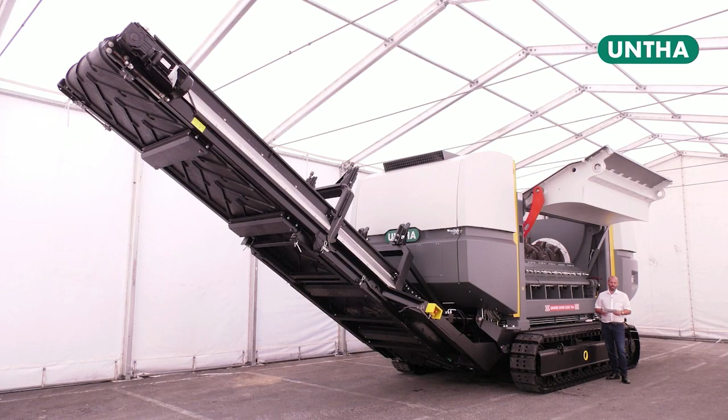First of all, we're starting with our new RC system. What is the essential principle of this system? This is a one-shaft shredder, a slow-speed shredder with an electric drive without a RAM device.

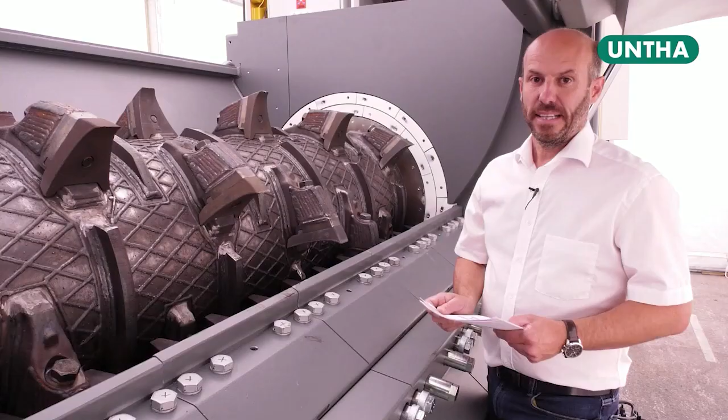For which application are we using this type of machine? This is mainly developed for waste applications, meaning MSW, C&I, bulky waste, or even waste wood and organic waste shredding. The output of our customer survey showed 2 hot topics.

The first hot topic was to have fast maintenance of the cutting system in the event of wear. We are fulfilling this through the small amount of cutters on the rotor. The second hot topic was to have a robust cutting system, which we fulfill through the size of the cutter and the fixing system we developed.

I want to show you now the technical details of this cutting system. First of all, we are starting with the cutting principle. You can see here we have huge cutters now, with a smaller amount of cutters on the total rotor.

Through the huge cutters, we are producing less fines during the operation of the machine. We are reaching a high capacity on the throughput side, and we are very aggressive to catch the material inside of the machine.

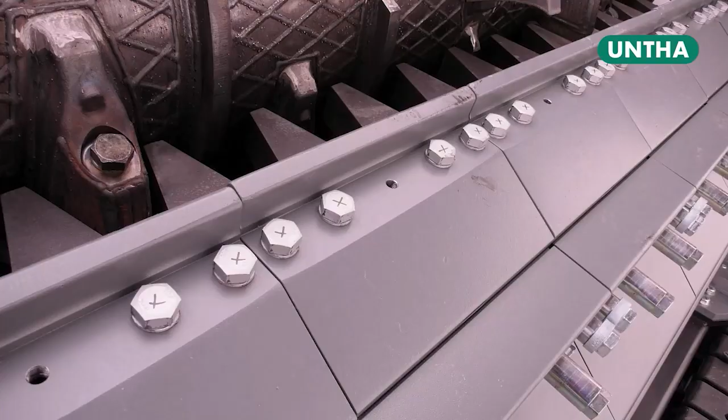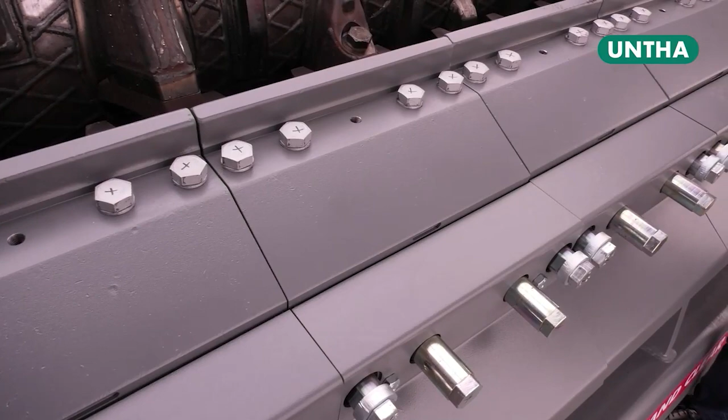How do you adjust the cutting gap? It is possible to adjust the cutting gap from 0 to 20 millimeters. This means you can extend the lifetime of the cutters if the customer adjusts the gap. On top of it, the machine gives better capacity, better particle size, and needs less electric energy.

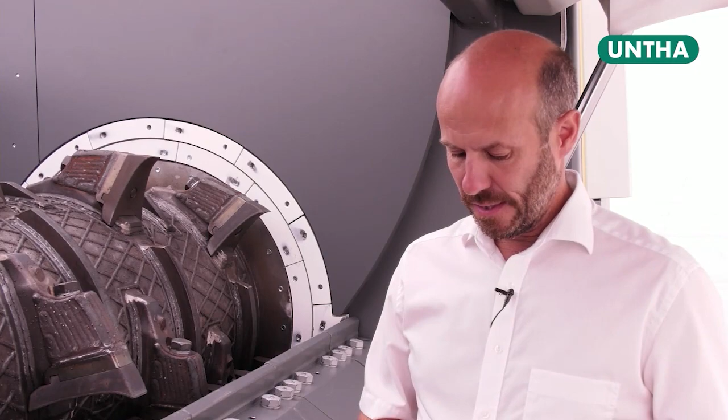The second advantage of this cutting system is that we are using no RAM device. This means the machine has, first of all, a lower purchase price. The second point is that we are getting a bigger feeding opening.

This is a quite important feature to feed the machine with shovel loaders or with big cranes. The third point is that using no hydraulic system and no RAM device needs less maintenance.

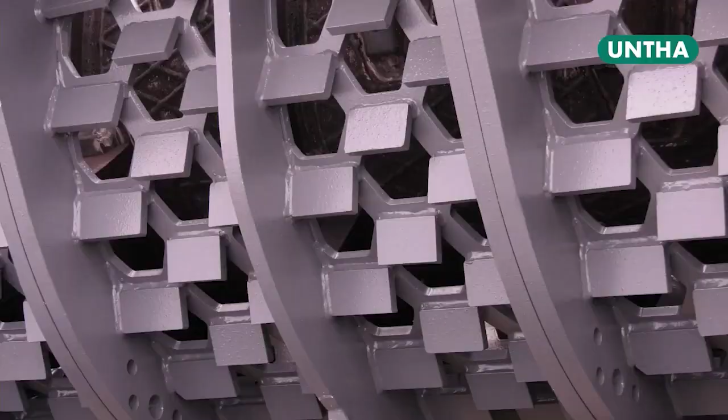The RC system can be adjusted with screens or with screen bars. Screens we use for the wooden application, meaning you can go down in one step to a real small particle size. Screen bars we use for the waste applications.

On screen sizes we have several sizes available. You can have this with or without chip breakers.

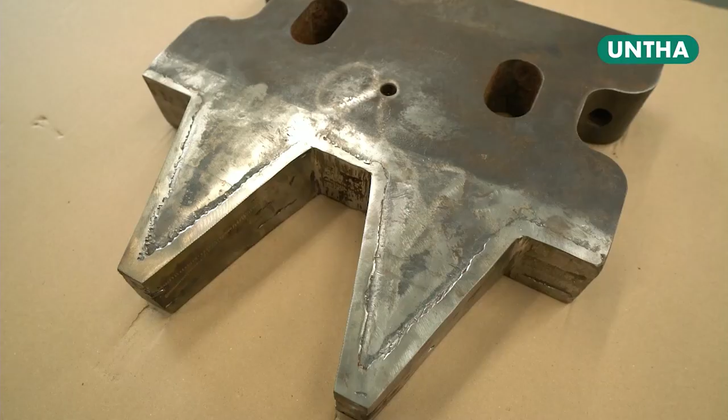How does the wear concept behind the RC cutting system look? The rotary cutters from the RC system are usable one time, the stator cutters two times. To have less wear costs, the cutters have to be wear welded several times.

Through the filler material on the cutting edges from the wear welding, the customer receives a longer lifetime compared with regular hardened steel. This work can be done after the warranty period by the customer himself, or UNTHA can offer this service.

At the moment this service at UNTHA is still some manual work, but next year we will have a machine-made solution available.

The customer can send various numbers of cutters to Kuchl, and we can provide this refurbishment. To manage this offer all over the world, we have to find solutions with our sales partners, who should give this service on a local basis.

Okay, so we have seen now the technical presentation of our new RC system. As next, we want to show you for which applications we are using this type of cutting system.

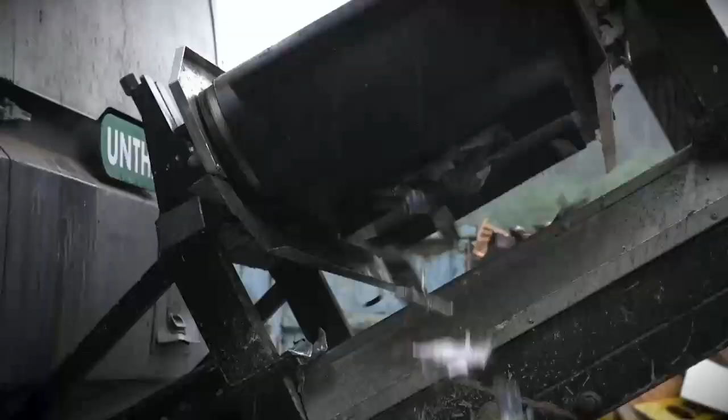Okay, on this video you could see a various amount of applications where we are using this RC system.

As next we want to go over to Daniel Vresnik. Daniel is our guy from the demonstration department, and he will give us a little bit of experience about what he has done with this new system on demonstration in the field.

Thanks, Christian. We did some specific machine tests on wood waste with a particle size of around 100 millimeters as the output size. This was more or less the task in a one-step shredding process to realize for different customers.

Therefore, we set up our demo machine in this kind of operation with different screen diameters, as also seen in the video, with and without chip breakers, to get full information about the situation. As a highlight, we had 2 long-term machine tests, one in Germany, where we did approximately 400 operating hours on site.

So we did a long-term run on the tool life to get real good figures about the tool life, as well as an overall throughput capacity, where we ended up as a resume at around 30 to 35 tons an hour, depending on the screen diameter.

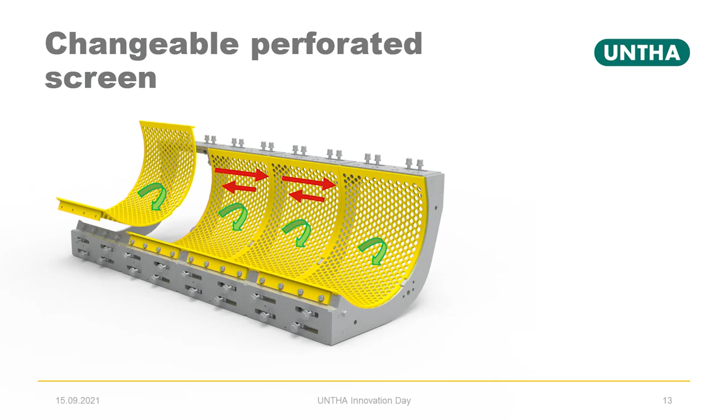Here you can see the picture of our new changeable perforated screens. This means we now have, as standard, included in our C models, and XR models are from now equipped with these changeable inlets. This means you just have to change the inlet as a wear part, and it's possible to rotate the screen 180 degrees and put the inside from the outside areas. So this is now included as standard on all our XR machines, and is something new on the innovation side.

As next, we want to show you a future development. This means this is something not available now, but will be available from spring next year. And we will show you the presentation of our new e-traction drive.

I want to give you now a preview of future developments. We had in the history customers which are moving the machine in a seldom way, meaning they are moving the machines every 2-3 months. But we also have customers which are moving our mobile machines in a frequent way.

This means they are moving every week, for example. On top of it, they have longer distances to drive the machine. And for this type of customer, our existing solutions are at the moment too slow.

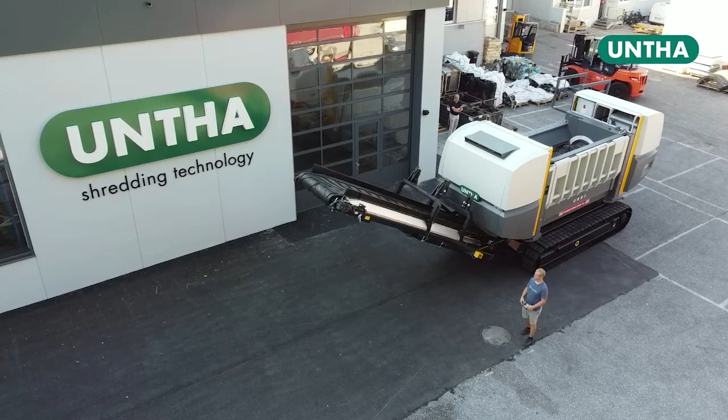For this requirement, we have developed a new driving unit which will run much quicker than the existing system. The request was that we increase our speed from actually 0.3 kilometers per hour to up to 1 kilometer per hour - this means 3 times the speed of the existing solution. For this, we have developed an electro drive on a battery basis.

Why have we changed now from our benzene or petrol generator to a battery pack? The reason was that to increase the speed, we need 3 times the size of the current power pack, and there was no possibility to have that place available on the existing frame of the mobile machine. So we had to develop a much more compact power pack, and this was one of the main reasons we could fulfill this with a battery pack.

The second reason was that our gasoline generators had from time to time a little trouble after longer standstills. This means if we are sending the machines overseas, it could happen that they had trouble starting afterwards. The advantage of the battery pack is that it keeps the energy and no start procedure is needed. On top of it, we had customers working with contaminated petrol and filters, which also gave some trouble with the generator. With battery packs, this will not happen.

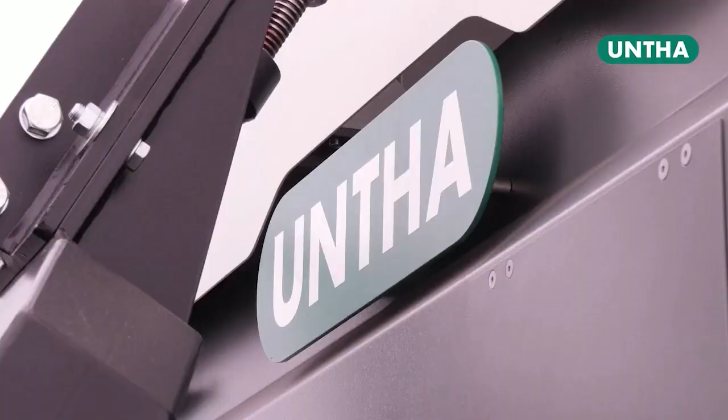For that reason, we developed this new system, and we will have it available in spring next year. I want to explain now the technical solution of this drive.

We will have two battery packs available. One will be the standard pack, which fulfills regular requirements, and the second will be a bigger pack, which can give a longer run for the machine for customers running wide distances. The battery is a special gel accu pack which needs no maintenance and no filling water required. The total drive will be controlled by a new remote control where you can drive the machine.

Thank you, Christian, for this great overview of the next stage of our XR shredder. Pretty informative. So yeah, thank you.

Great news. Next, we would like to present a pioneer in technology. And once again, we will start with this video.

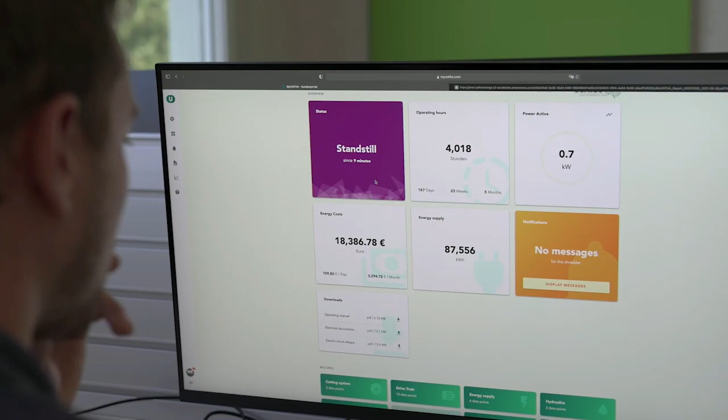Well, what a fascinating topic. We call this UNTHA Genius, and we call it the shredder's brain. And I'm sure you're going to be amazed, and hopefully Marcus is going to be the guy to amaze you. So I'm now going to hand you over to Marcus Ebel, who is the expert on the Genius technology.

Marcus? Thank you very much, Gary, for the introduction. I would also like to welcome all of our viewers. And today we talk about Genius.

It's already 3 years ago when we decided to bring shredding to the next level by digitizing our products. As you all know, from a historical point of view, we are a company that mainly deals with the development of mechanical solutions, mechanical engineering. So this was completely uncharted waters for us, completely new, and we were faced with a lot of questions at the beginning.

What is digitization, or what does digitization mean in terms of our machines? What are the advantages that this product should bring to our customers? We made our thoughts about this question and brought up Genius. And now I have a short clip for you that should answer most of these questions.

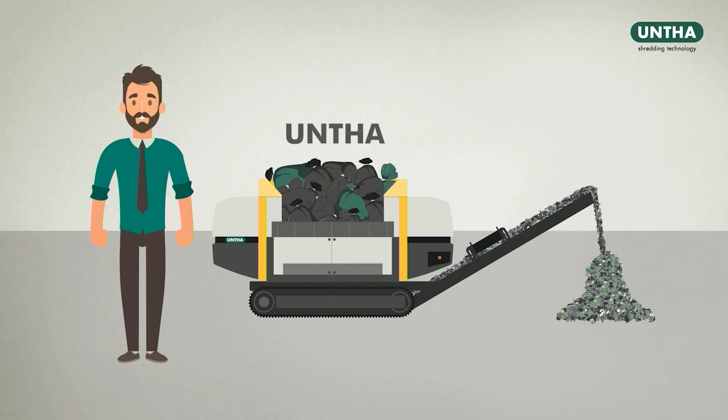UNTHA Shredding Technology. This is Mr. Meyer. He is the CEO of a waste management business and operates a recycling plant with an UNTHA shredder. Mr. Meyer is happy with his shredder, but there is always the risk of an unscheduled shutdown of his plant. It's always annoying when it happens, as these interruptions cost time and money. To increase plant availability, Mr. Meyer is keen to avoid future shutdowns as far as possible. There is now a great solution to help him achieve just that.

UNTHA Genius, your shredder's brain, the intelligent condition monitoring tool for UNTHA shredders. This tool presents Mr. Meyer with several advantages: a high level of plant availability, the immediate correction of deviations, increased productivity, significant cost reduction, and maximum data transparency in real time. Via the customer platform myuntha.com, Mr. Meyer is able to analyze, manage, and optimize his UNTHA machine pool in an easy, user-friendly manner. He is able to review all process and operating data at any time and is always up to speed on the latest condition of his machine, as well as the exact energy costs.

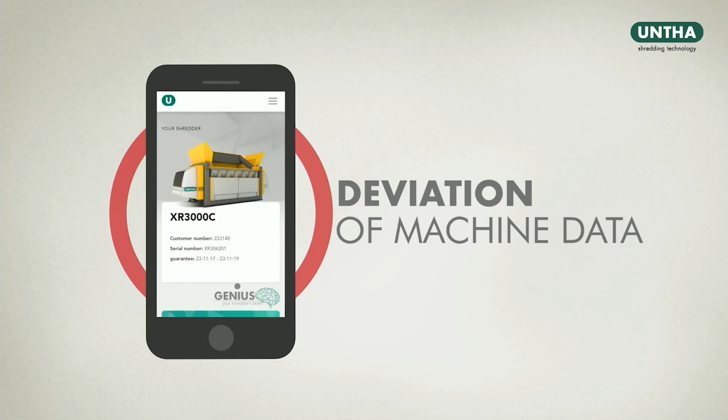Mr. Meyer can identify looming machine issues before they happen, plan service calls, and punctually order spare parts. As soon as a deviation of machine data is detected, an alarm push notification is sent to his smartphone or PC, helping him identify the fault and decide what to do next. He can access and evaluate productivity reports for his plant at any time, daily, weekly, or monthly. For questions, he can contact the UNTHA Customer Service Centre to clarify details, arrange a service call, order spare parts, or purchase additional service products. Since Mr. Meyer began using Genius, he has benefited from higher plant availability, increased utilisation, reduced operating and wear costs, and maximised cost effectiveness. This makes Mr. Meyer very happy indeed. UNTHA Genius, your shredder's brain.

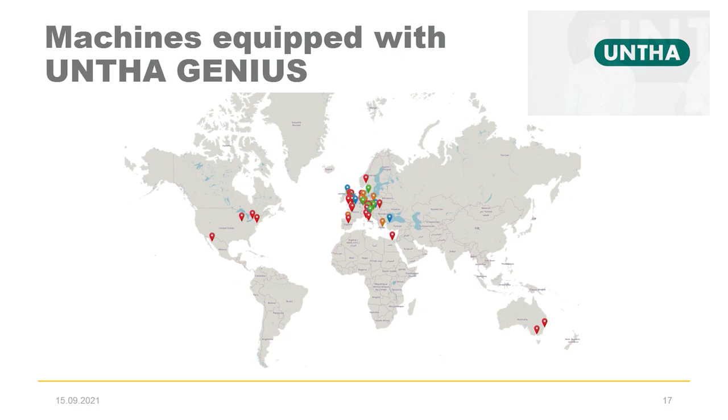After 2 years of development, we are pretty proud that last year we launched our first digital product, Genius. One year later, today, we've equipped more than 100 machines with Genius, and I brought a map with me where you can get a small overview of where the machines are distributed. You can trust me, those machines are getting more and more.

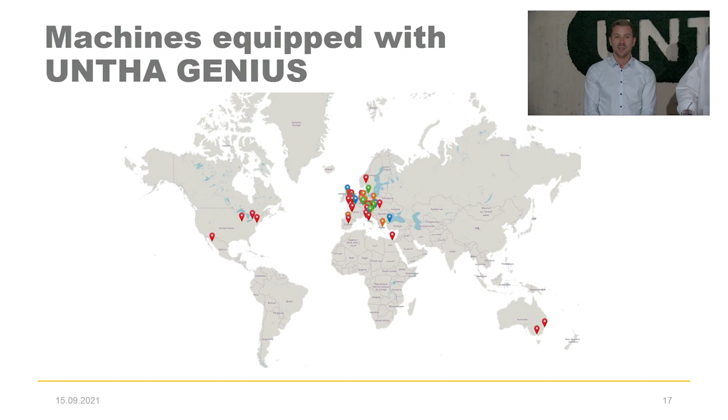Without announcing any of the features of Genius, it must be clear that this brings customer service to a whole new level. We have more opportunities because we have all the machine data in one platform, we can access it 24 hours a day, and our service can react to issues in real time, so to say. But enough of the theoretical stuff.

I would like to show you the advantages of Genius in terms of our customers. I visited a customer a couple of days ago, located close to Salzburg, not too far from here. We did a short performance trial there, and after a short video, we will analyze this trial together with the help of Genius.

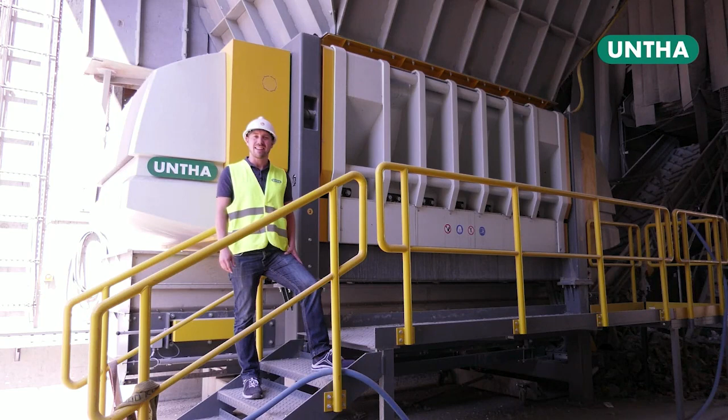Hello, ladies and gentlemen. Today we are at the site of our customer, SAB, located north of Salzburg. Behind me is a brand new XR3000 that was installed just a couple of weeks ago. It's equipped with an RC cutting system, and this customer mainly processes bulky waste with it. Here are some impressions of the machine.

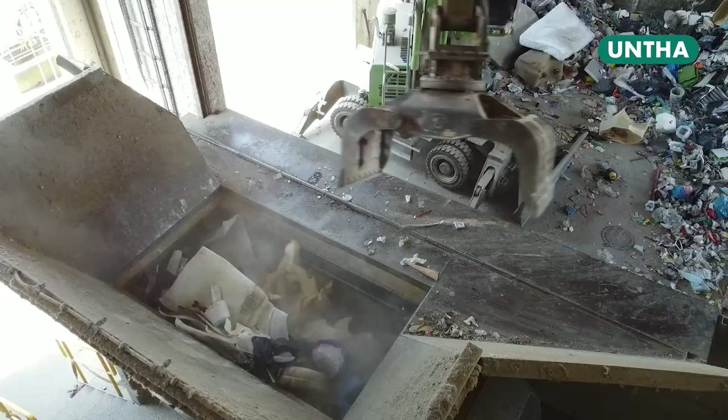What you can't see directly is that this machine is equipped with Genius, our real-time machine monitoring and assistance system. To show you the advantages of Genius, especially the reporting feature, we will do a short performance trial today. To let you follow the performance of the machine as well as Genius, we'll split the screen so you can see the machine status, the actual power, and the rotational speed. Because I'm pretty sure you'd rather see the machine performing than me talking, we'll start the trial right away. So, here we go.

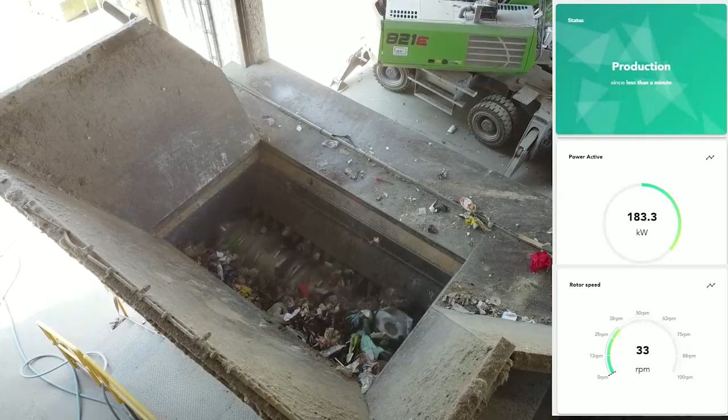Since it's pretty loud here and much more comfortable in the studio, we will analyze this trial back in the studio.

Those of you following this presentation carefully may have noticed that this is the same site and the same customer that Christian showed before for the RC performance trial. This once more underlines that our customers are satisfied with our product. The machine before was a trial machine of ours, and now the customer bought the machine. But back to Genius. The most important factor of this trial is not the performance of the machine in this case, but the fact that Genius is a real-time machine monitoring system.

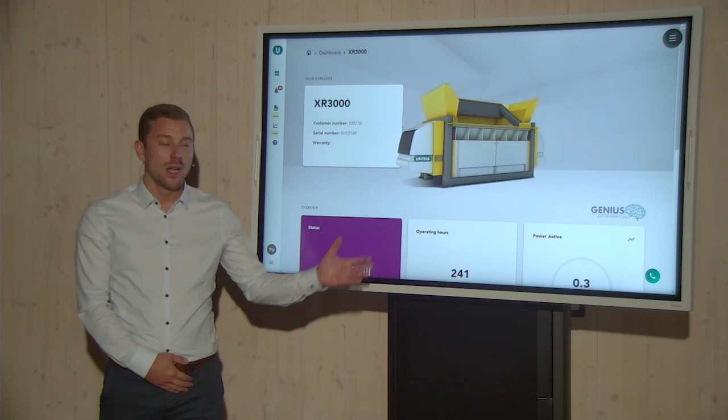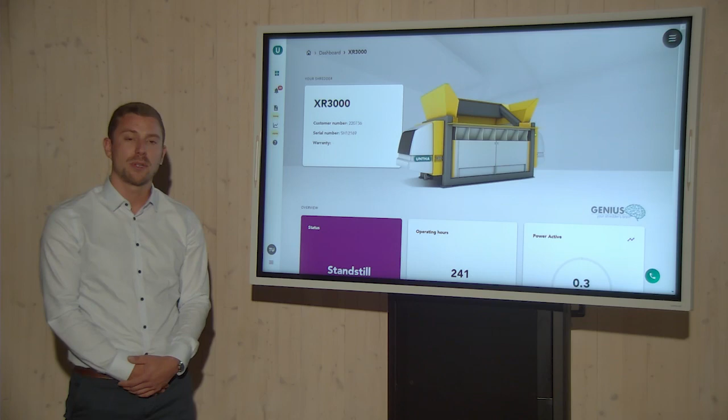So we have all the data in real time online, and that's all over the world. What you see behind me should be somehow familiar to you. This is the dashboard of Genius, exactly the machine we demonstrated a minute ago. At the moment, the machine is standing still.

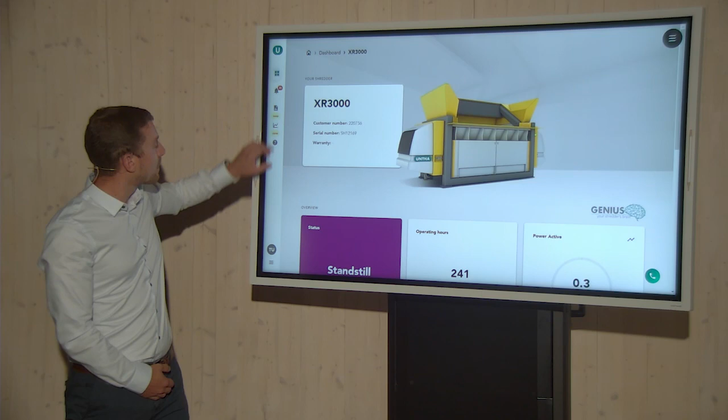That's also a fact about Genius - it's always telling the truth, so to say. It doesn't lie. And if we go one step back, we will here see the dashboard of my UNTHA.

So here we have different features, and we have two more boxes here. They were launched just a couple of months ago. But since this is not a technical training today, we will just focus on the reporting function today. Don't worry, we will have a technical training on 1st of October. You will get the invitation for this event after this day.

So if we click here, we go to the reporting. The first window that pops up here is a short tutorial for this feature. It explains the user how to use this feature and points out the most important advantages of it. Since you have me today, we will skip this one and directly go to the report window. Don't worry about all these numbers and the text here.

We just click here in order to create the report. Here we have two different options: either you create a one-time report, or you can create an automated report, which is much more comfortable for our customers. For the one-time report, we have a simple mask where you can type in the shredder, if you have more than one, the time period, as well as different parameters like the throughput of the machine. To save some time, I already did this for you because it takes a couple of seconds to generate these reports, so I will just go to this specific report.

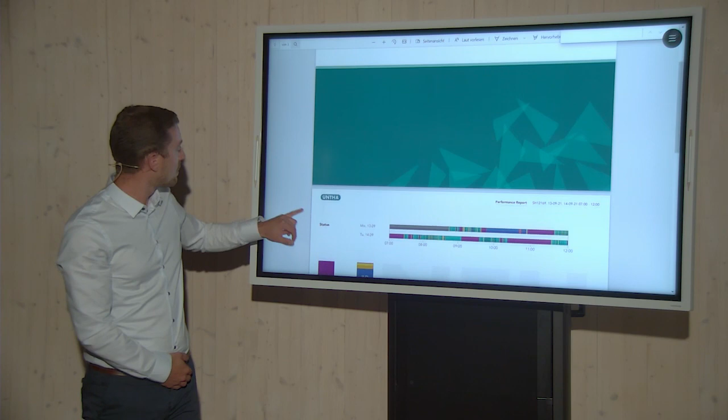But where it's getting interesting, that's the second one - the second slide. This is an automated report of 2 days. What the customer can do with this kind of report is take a look and try to optimize its machine. So Monday, we see the worker came a bit late, typically Monday, so to say. On Tuesday, different day, different worker started earlier, but therefore had a couple of breaks.

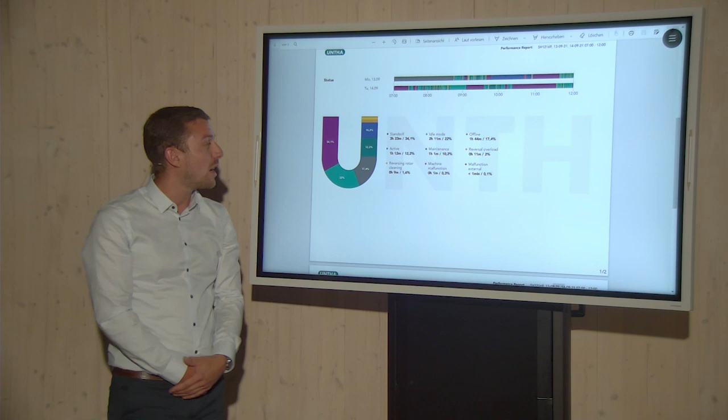What we can see here is the distribution of the different states - how long the machine was in production, how long it was in idle mode. What's pretty nice here is that for the future machines, we have the opportunity to declare certain maintenance steps directly at the machine. So we see here that one hour of maintenance was done directly at the machine.

But since this day is not a technical training, but it's called Innovation Day, and we want to face the future, I also want to talk about the future developments. First of all, I want to go deeper into the developments of UNTHA.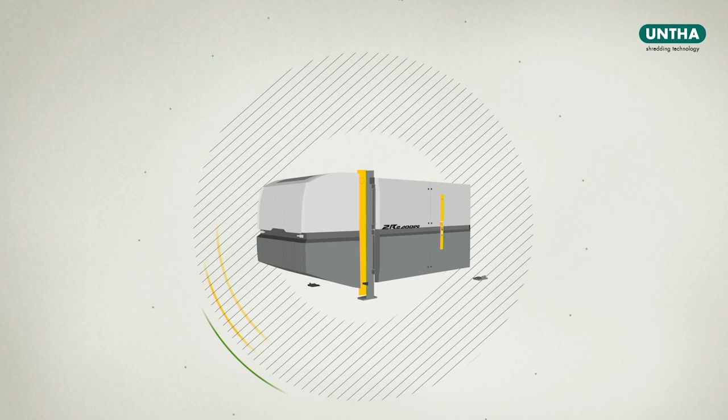UNTHA shredding technology. You're looking for pioneering technology for coarse shredding applications? Then the ZR class might be just what you need. Thanks to its innovative drive concept, the ZR is a highly economical 2-shaft shredder with the lowest life cycle costing in its class. Based on the tried and tested XR class, the UNTHA engineers developed this high-performance primary reducer. Its slow-running ripper cutter system ensures problem-free shredding of your materials.

With its robust machine construction, the ZR is suitable for tough, continuous operation. It reliably shreds domestic, bulky and industrial waste, waste wood, mixed construction waste, bales and much more. It is also suitable for processing scrap metal, white goods and electronic waste.

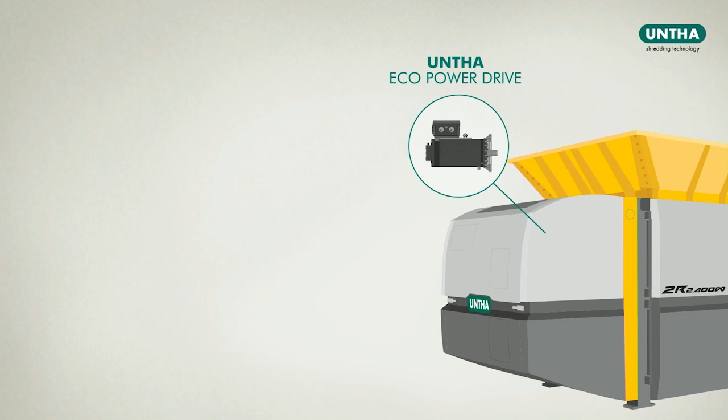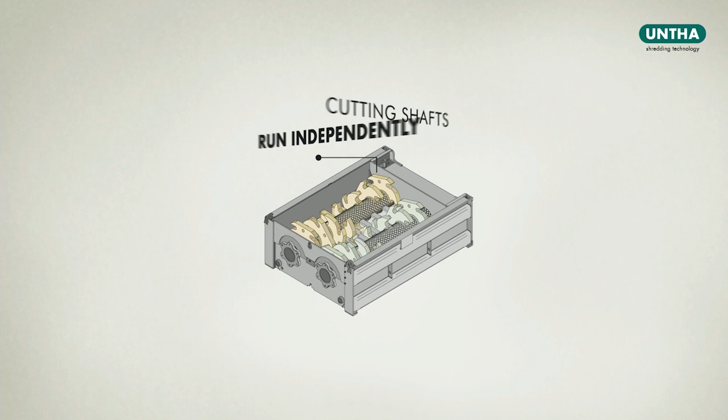The benefits are clear. The UNTHA Eco Power Drive keeps energy costs to a minimum. The cutting chamber is easy and quick to clean in case of a change of material. Maintenance is efficient and straightforward. The cutting table and the cutting shafts can be exchanged within 1 hour. The cutting shafts run independently of one another, thereby ensuring perfect material breakdown.

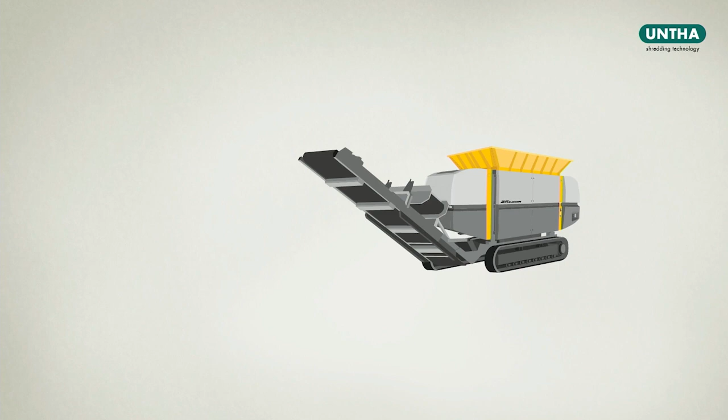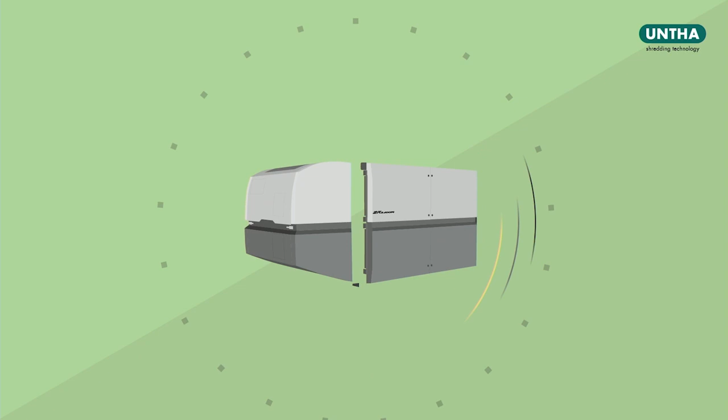For even more flexibility, this primary reducer is also available in a mobile version. It comes with UNTHA Genius, the condition monitoring system for more productivity. All that and much more makes our primary reducer a reliable powerhouse that pays for itself, hard-wearing, cost-efficient. Take the opportunity of trying out the ZR on your premises.

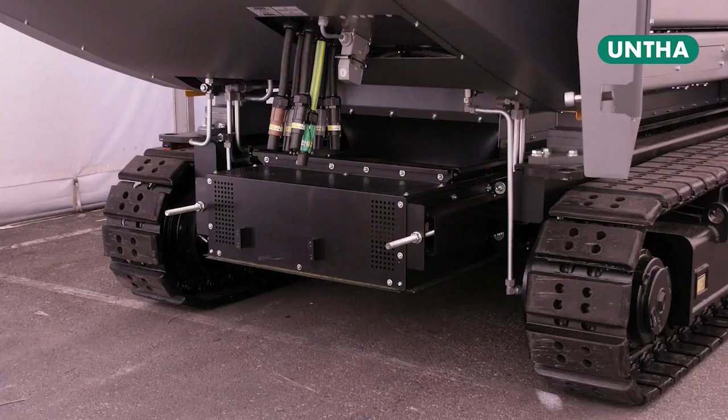In the metal application, we have a various range of different materials what we have to shred. I want to show you just a few examples where we have experience now. This is a mixed aluminium, this is aluminium profiles, we have aluminium copper coolers for example. We have guardrails from motorways or bundles of aluminium wires. These are just some examples of what we can do with this machine.

On top of it, we have also seen that the machine is really good for white goods. So this means for shredding of refrigerators or for washing machines. There we had until now really good results with this type of machine.

Which capacities, in which field is this machine working? In the waste application, just a few examples: we have experience that we are shredding about 50 tons an hour on C&I applications. In the metal business, we have seen that the machine is working in a field of about 8 to 15 tons an hour.

So, which particle size can you reach with this machine? We have developed the machine for a particle size of more or less 300 mil. This is the application where the machine is working in the best way. This means the 300 mil has the advantage that you can transport the material afterward very well, and the different sorting systems can work with this particle size very well. On top of it, it's very important that the machine opens up the material, meaning it's not compressing the material. This is, for high quality sorting lines afterwards, a real high requirement from our customers, which we can fulfill with this machine very well.

Now we are coming to the technical details of this machine. First of all, we have two basic models: the mobile version, what you can see here in front of me, available on tracks, and the frame underneath this machine is the same as on the XR models. For static applications, we have a various amount of underframes available, but we also have accessories on hoppers, which we can design right for the customer's requirements.

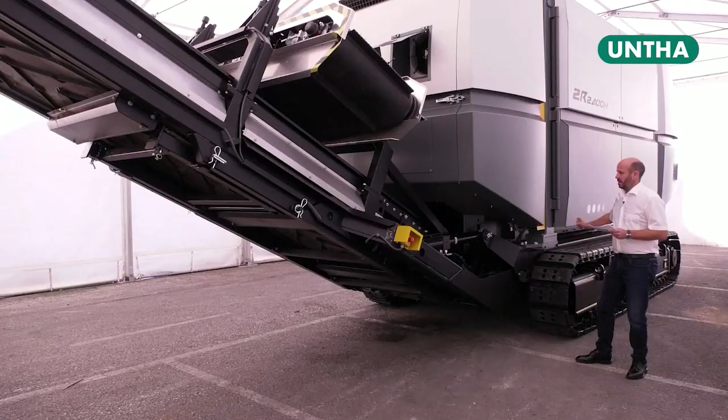The advantage of the mobile and the static version is that we can still demonstrate the machine on site. This is also our success on the XR applications, that we can go with the mobile machine on site, demonstrate it to the customer, and the customer can afterwards order a static or a mobile version. The discharging system of the mobile ZR series is the same as the XR series - we are using the same conveyor belts, the same overband magnetic system, and the same hydraulics.

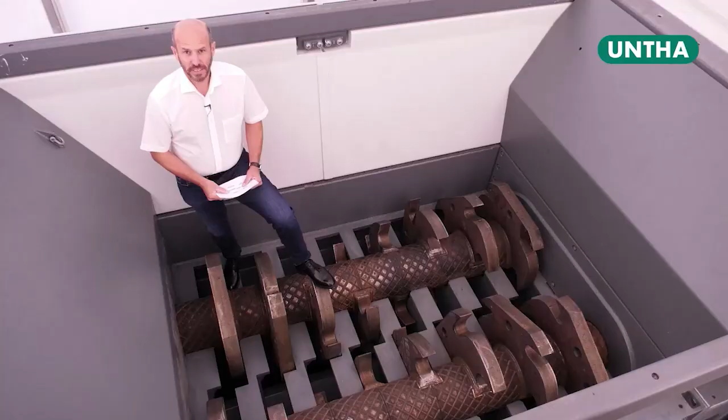Now we are coming to the heart of the machine, the cutting table. We have two different types of cutting table available. For waste applications, we are using the H table, what you can see here - this means the H table has a horizontal surface. For metal application, we have developed a special W table, which has the shape of a W and works very good on metal applications.

The waste table and the waste shafts, what you can see here, have 8 blades on each shaft, and the thickness of the blades is 80 mm.

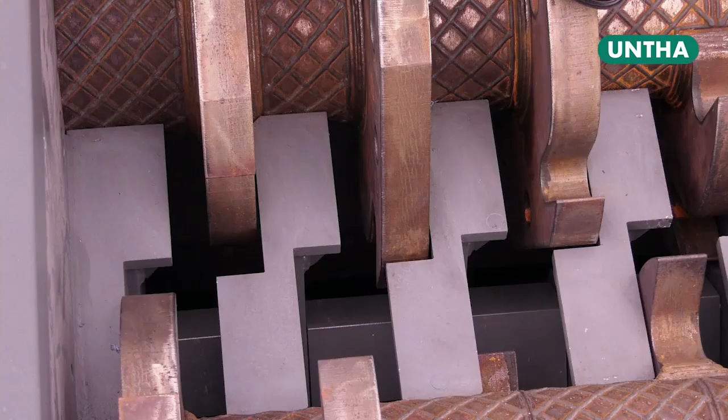How is this cutting principle of the ZR working? You can see here both shafts, and the table means the shafts cutting against the table. Every 30 to 60 seconds, the rotation of the shafts is turned, and both shafts change direction individually. Through this function, the material inside the machine is opened and comes all the time in a different position, and the machine can take it very good. The machine is using no screen underneath, so the gaps underneath are open and the material drops down to the discharging system.

What is now the difference from the W table to the H table? On one hand side it's the shape, what I explained before, and the second is that the gaps here in the center are opened on the waste table and closed on the metal table. This means we can treat smaller particle sizes on the metal applications.

Now we are coming to the maintenance of this table. As you can see here, we have no replaceable pieces what you can change. In this type of ZR series, you can work just with wear welding. There are two possibilities: you can wear weld the shafts and the table here inside the machine, or you can do this outside in the workshop if you are using our quick changing system - the table is transported into the workshop and is refurbished. Depending on the application, you have to calculate that you have to do this work every 500 hours.

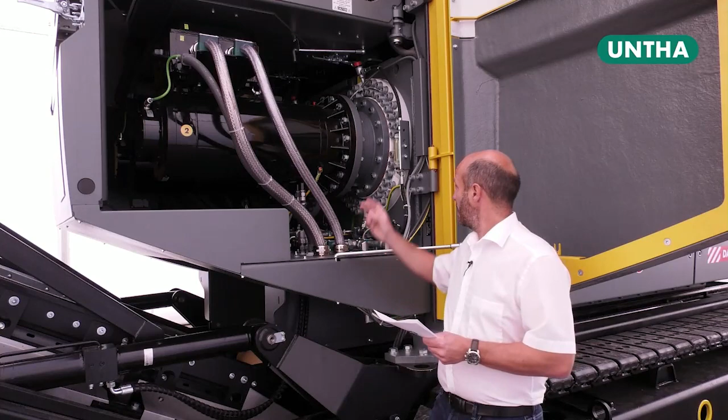As next point, I want to show you the drive of this machine. We are using for the ZR series the UNTHA Eco Power Drive, what you know from our XR series - we are using here the same parts and components, meaning the frequency converter, the electrical motor, the clutches and the gearboxes are exactly the same as from the XR series. We are using for the ZR series the modular construction system from the XR series, so the advantages for the customer are that they have the same spares and same components into the plant, into operation.

Why are we using this UNTHA Eco Power Drive for the ZR series? The UNTHA Eco Power Drive is for the ZR series the perfect drive, because we are using there the synchronous drive, and this kind of cutting system needs a lot of dynamic of the drives. This means we have a lot of forward-backward operations, and for this the UNTHA Eco Power Drive can use its strengths and is a really perfect solution.

On top of it, we have no wear parts or less wear parts into operation. We have no belts, or no parts which need maintenance. We just have the clutches inside which can cut off the right torque on the machine, and it's a real low wear drive.

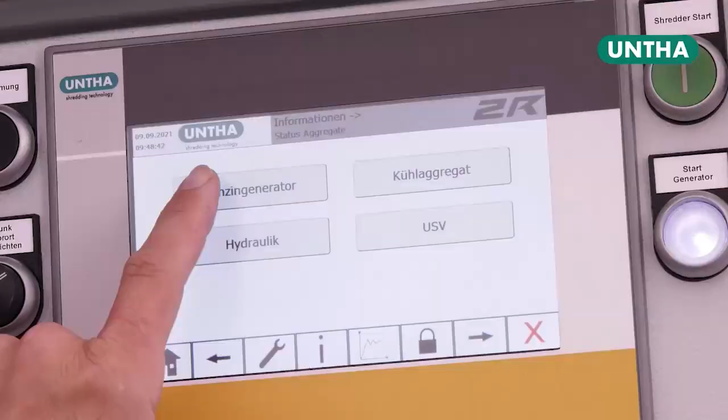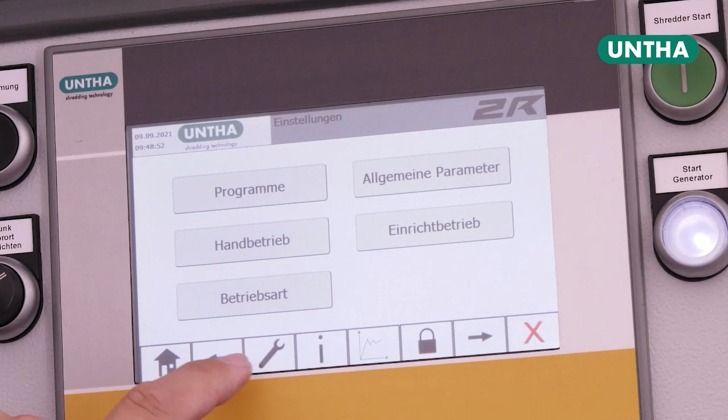So we have shown you the technical explanation of the machine. The next question is, how will this machine perform? For this question, we prepared a video for you from machines which are already in operation.

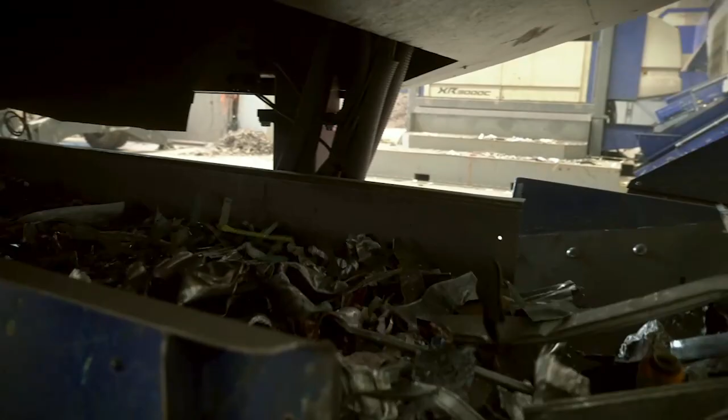This video gave you the first impressions of the performance of this machine. As the next point, we will show you the unique selling point of this machine - our quick table changing system. For this we have prepared a short video as well.

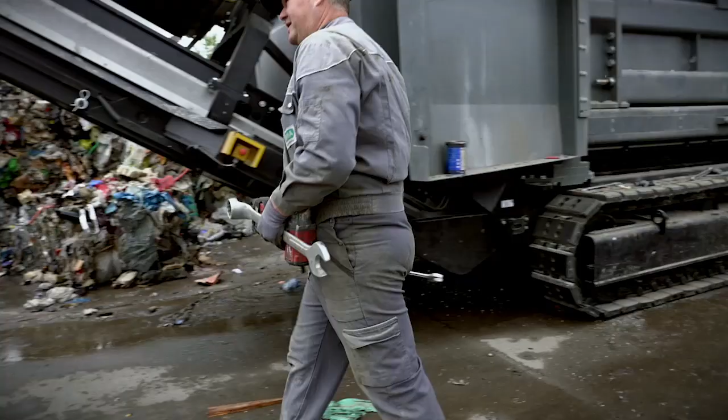So I hope you got the first ideas and impressions from the machine during operation.

As the next point, we have here from the company Schaufler, Mr. Schwarz. He has been operating this machine for 1 year now, and I have 2 questions for him. Perhaps he can answer them for us very well.

Mr. Schwarz, how is your experience regarding the electrical power consumption of the machine after this 1 year period of operation? And the second question: in the metal business there's a special requirement - you very often have to clean the machine because you're changing the input material. What experience do you have with cleaning the machine?

Speaking about energy consumption and energy costs, on our side we are focusing on the specific energy input, meaning kilowatt hours per ton. Why are we focusing on it? Because energy costs are rising year per year. For materials which are hard to shred, energy consumption is generally very high. The ZR's energy consumption is surprisingly low. We were very surprised by it.